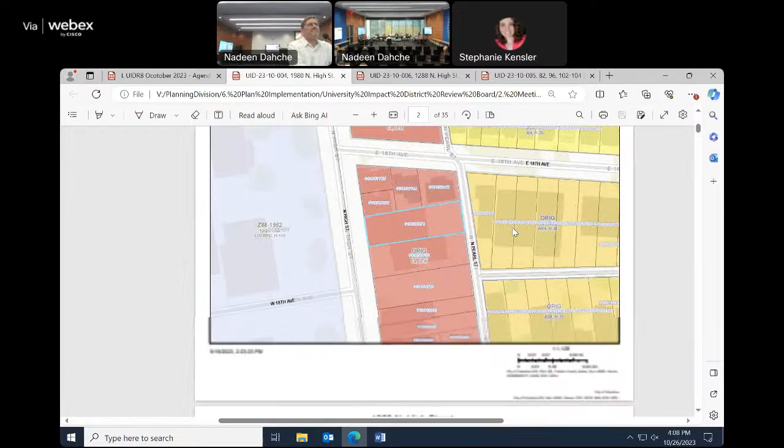Wow, okay. Do you have any - would you like to run through quickly? Certainly. So this is the application they submitted for the variance. And just as a reminder, this is the PNC ATM, where they were moving it from the vestibule to the outside of the building. The condition that had been placed on it was that some additional lighting was added, so some out here.

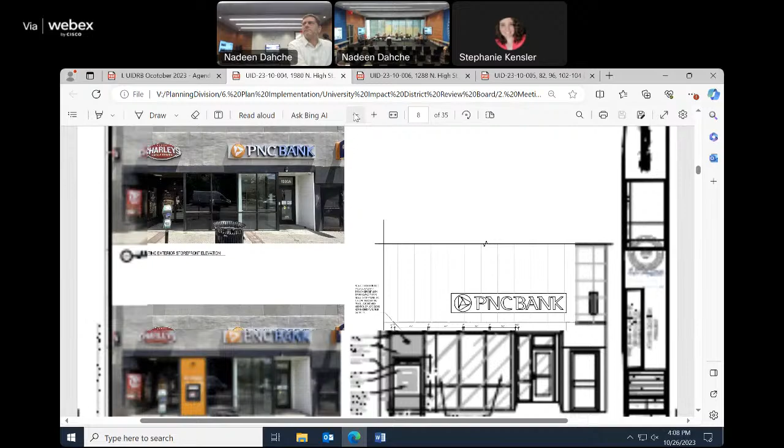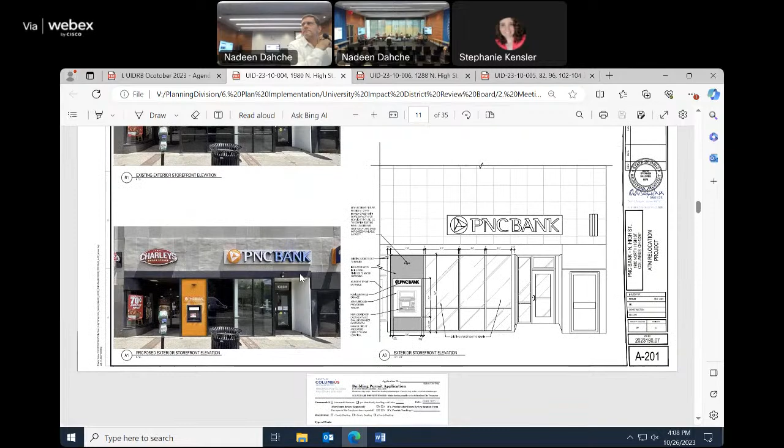So this is its future state. And what has caused the variance - here's just the COA showing that what they're asking for the variance for is the same thing that we approved. They just didn't know they needed the variance at the time. And these are the drawings that we stamped in the COA we issued.

Motion to approve. Second. Right, before we go there, is there anything you'd like to add?

I do need to swear you in before you speak, but if there's something you'd like to add, you're welcome to. Don't need to take up too much time on something like this. Do you swear to tell the truth, the whole truth, and nothing but the truth? Yes, I do. Proceed.

Just pointing out that the existing condition has, I believe, 55% full transparency of glass, and the new condition would not be reducing that in any capacity. It'd just be changing out one of the opaque glass panels for an opaque material for the ATM, for security purposes of things happening in that vestibule. That's really the crux of what they're trying to accomplish.

Before there are motions, are there any questions from board members? Can I make a comment, like a report from the University Area Commission? This came up before the commission in September and was approved unanimously with no comments from the public.

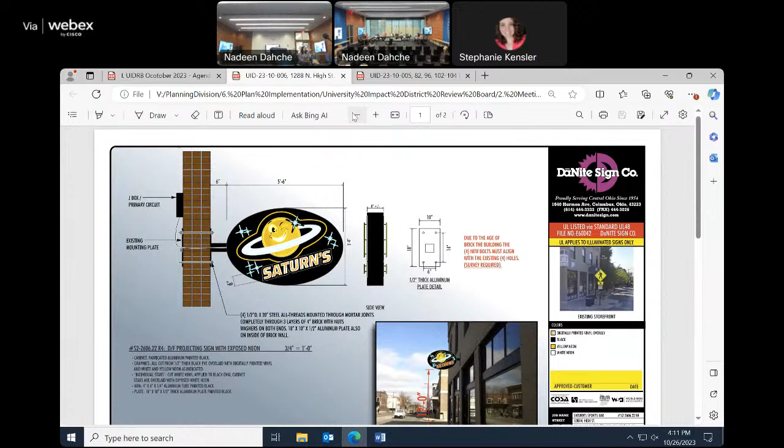1288 North High Street. The applicant is requesting review and approval of a new 5.5 foot by 3 foot oval internally illuminated projecting sign with exposed neon, per the submitted drawings. The submittal includes sign detail and a site plan, these two pages here. Let's see the size, the mounting details, its location, and here is the location on the front of the building. Here's High Street.

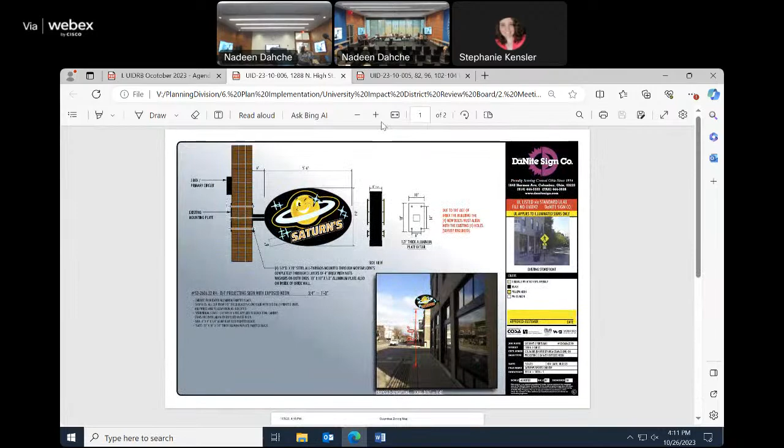After review, the proposal is generally consistent with the University District Plan. The plan recommends that new signage be a logical and complementary component of the overall storefront, not permanently alter historic building materials, and include a simple message. The University District Plan also notes a preference for projecting signs and specifies a minimum clearance of 10 feet from grade, overall size of 6 square feet per side, with lettering between 4 inches and 10 inches, and that signs should not project more than 6 feet.

The application is consistent with these recommendations, with the exception of the overall size, which is why staff couldn't approve it outright. As proposed, the sign is 16.5 square feet per side. Despite being larger than the plan recommendation, staff supports the proposal as it is appropriately sized for the building and location. Staff recommends approval. Is the applicant here? Yes.

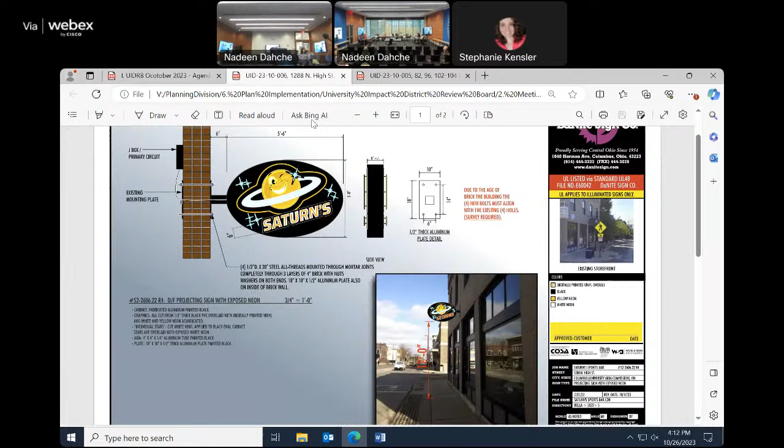Would you raise your right hand please? Do you swear to tell the truth, the whole truth, and nothing but the truth? Yes. Do you have anything you'd like to add to the city's review of the proposal? I don't think so, I'm happy to answer questions if you have any.

We did already make some adjustments based on making sure that we comply as much as possible. We felt like the sign that was there before, the North High Brewing sign, was actually larger than this, so we thought this would be fine. Was it a blade sign as well? Yes. Okay.

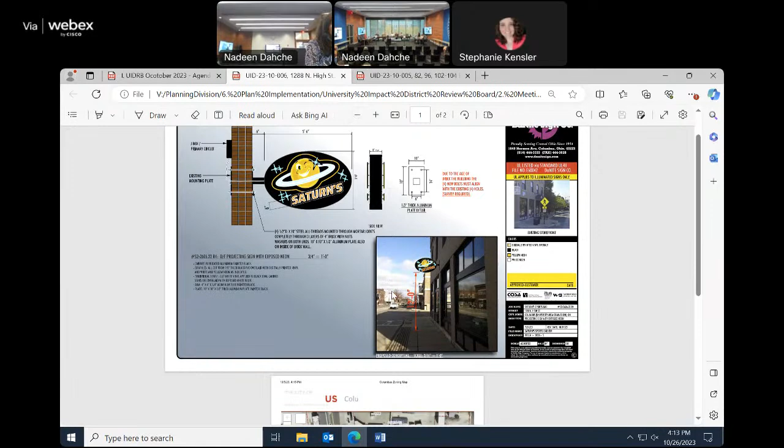I just have one question. Usually we ask that the bolts are covered, but it looks like in this graphic they're exposed. I don't know if the applicant was given models of what's typical, but in all past blade signs I've been part of the approval process, we've asked that they cover that piece of hardware.

We are planning on reusing the existing plate location. We told the landlord we would not make any additional holes in the brick, so I'll have to see what we can do to cover it. That's interesting because the previous one doesn't look like the bolts are covered, but we can see what we can do.

You're thinking about the last one we approved, but I'm trying to think about other examples in the nearby area that could give you a model for that. Yeah, that would be helpful, to know what you're looking for and how you want us to do it. Is that not specified in the guidelines, Steph? Not that I'm familiar with.

It doesn't really bother me as long as they're maybe painted black to match the plate. I would be fine with that. I don't think it would distract too much, given the height of it.

Are we making either covering or painting this a conditional approval? No, I would approve it as is. I'm just raising it for recognition of consistency with what we've done in the past.

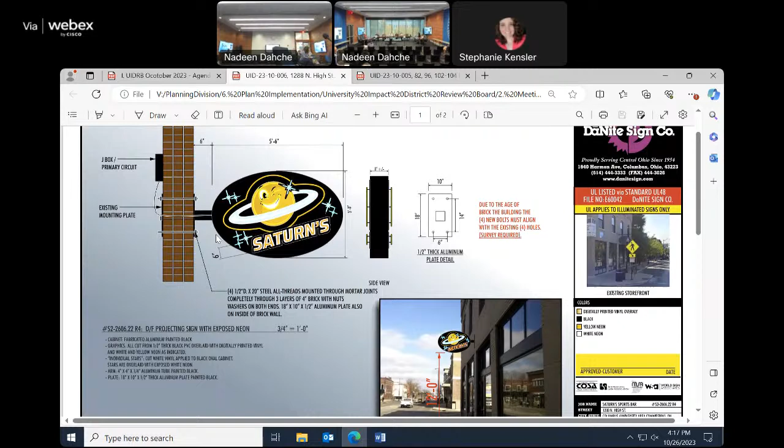Which brings us to UID 23-10-005, 82, 96, 102, 104 East 16th Avenue.

The applicant is seeking conceptual review for the construction of a new residential building. The proposal includes the demolition of several potentially contributing buildings on the sites, construction of a new 6-story residential building with amenity space, terraces, stoops, tall first floor glazing, street trees, and parking on a proportion of the first 2 levels. The submission includes a massing study. I'll go through that quickly - it's just a couple of pages - and then we'll finish up with that report.

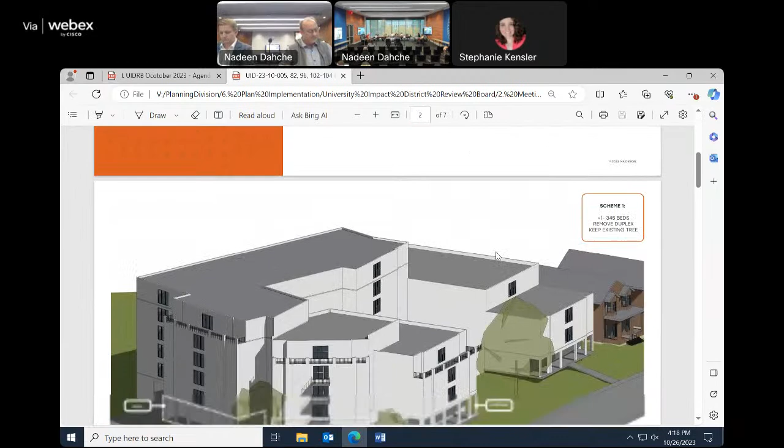If you all recall, at the last meeting it was suggested to the applicant that they go back and review these things, so they did that. That's why we're seeing much less detail this time around, and they're providing 2 different scenarios for the review and discussions.

So this is the first one. Essentially, this one is 345 beds. I know someone asked about parking - I think parking is staying the same, the applicant can confirm that. In this scenario, that third duplex is going away and they're keeping a tree here.

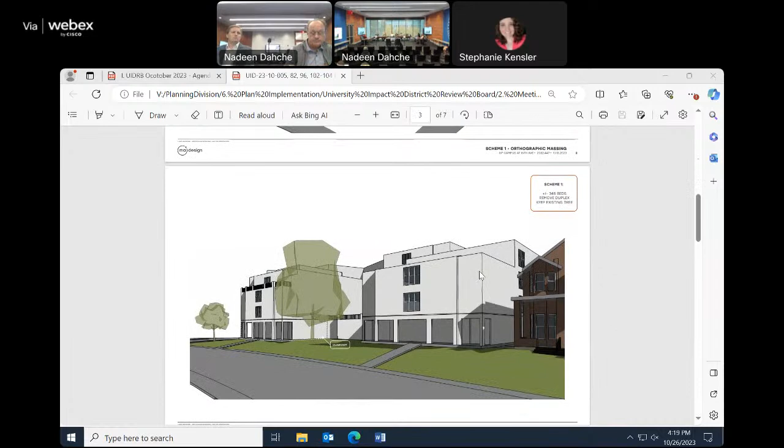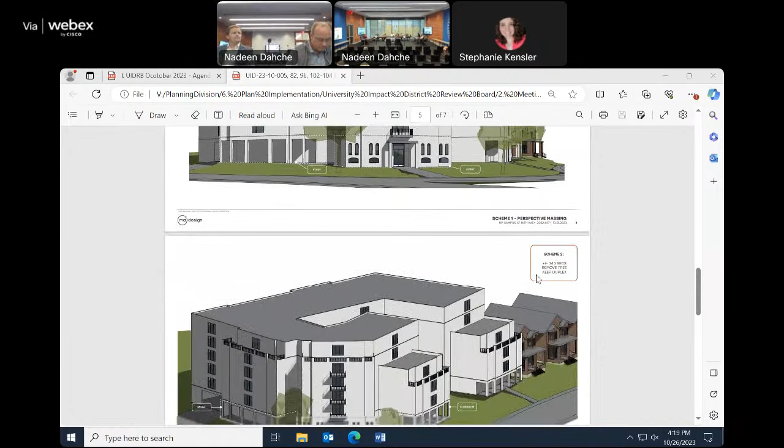And then here's the kind of more ground level view from 16th of that scenario, and here is kind of from the fork in the road. And then scheme number 2 keeps that third duplex, but we lose a tree here.

And then the massing is just a little bit different. And then you have those two perspectives.

So the proposal came before the UIDRB in July, August, and September. At the most recent meeting, the board stated that the applicant should reevaluate the massing and consider the taller portion

of the building being either in the center or along Waldeck with lower heights along 16th Avenue. The board also encouraged the applicant to explore a scenario where the third duplex is maintained and noted that removal of the mature tree along 16th Avenue could be supported if it resulted in a higher quality building design.

Upon review, the applicant has provided two massing options for board review. As previously noted, the recommended land use for the site is institutional. However, staff notes that these properties are generally surrounded by parcels recommended for higher intensity residential.

The plan does provide guidance on adaptively reusing institutional sites. As such, staff could support a higher intensity residential development on this site if the proposal is consistent with plan recommendations. The plan recommends that new construction be compatible with the surrounding neighborhood in terms of size and scale.

The revised options are somewhat consistent with this recommendation. While the proposal is more intense than the current use, staff understands the transitional nature of the site. Each option steps back into the neighborhood differently.

In scheme 1, a larger portion of the building has been reduced to 4 stories along the eastern property line as a transition from the development to the lower intensity portion of the neighborhood.

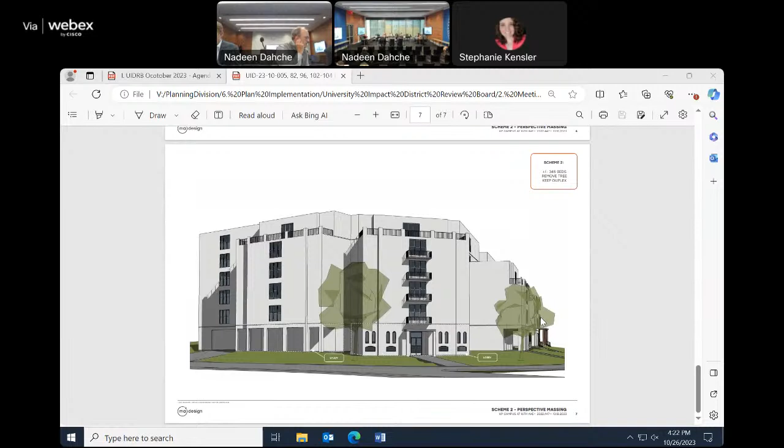In summary, both schemes are generally consistent with the plan, although scheme 2 is more so due to the ability to maintain most of the mature trees and green space, additional element of preservation, and more consistent massing along East 16th.

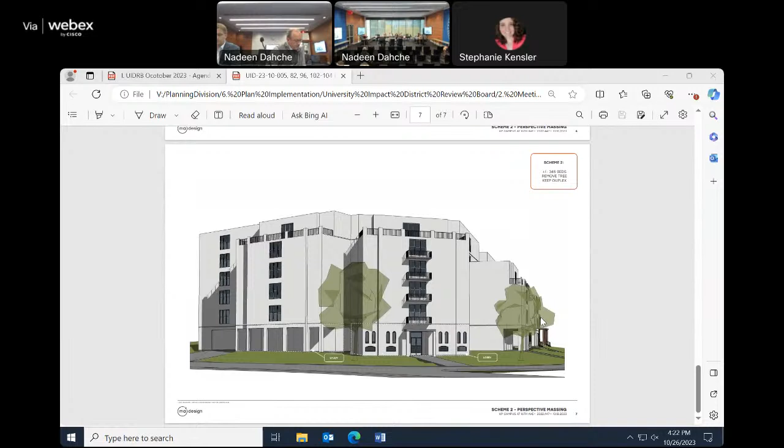Moving forward, staff recommends the applicant continue to take the University District Plan recommendations regarding building and site design, materials, lighting, landscaping, and parking into consideration as the design continues to develop. The applicant should be mindful of the applicable land use standards and engage with the Department of Building and Zoning Services to identify any needed variances.

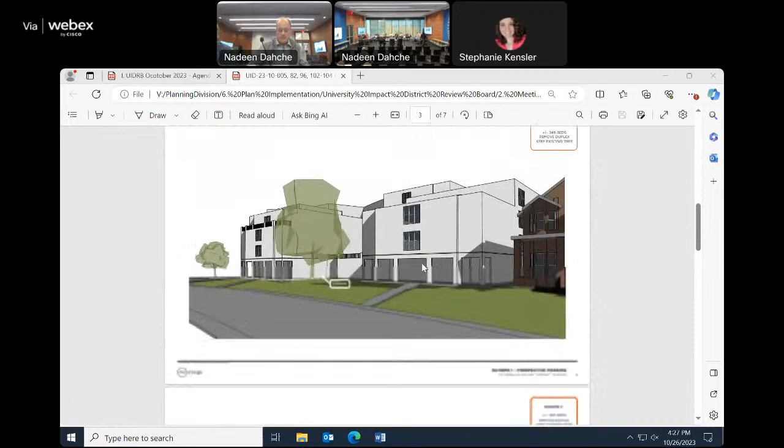There's, can you put it, I'm sorry, page 2 in that, because that has the plans on there, both the models. I think it's helpful to see both. Is that page 2? The one that's got both. Page 2, it's this page. Where's the page? Well, while she's looking, it's fine if that's the one you got handy.

The point I wanted to make was that we looked at the site as we have been looking at it, which was basically taking down the residential property to the east. And we looked at a different massing study to specifically address the concerns about the frontage of the building on 16th and Waldeck Avenues. So what we ended up doing is basically stair stepping the building.

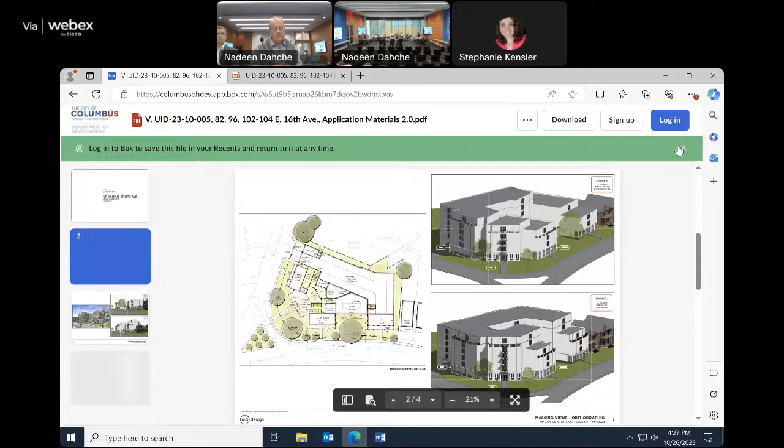There you go, perfect, thank you very much. So the top scheme, on the top right, is scheme 1. That's the one that doesn't retain the building to the east and also the tree.

And I will make a point, Carrie, I did go up to Worthington Thomas. I live in the Worthington area, so it's not that hard. But I looked at those trees that are being preserved out there along the street frontage, and those trees are much bigger. Yeah, very big, they're monumental trees without a doubt. But the amount of land that they were using or taking to protect those trees during construction was phenomenal.

Yeah, it's very significant. So to your point, I'm not sure any one of these schemes would really be able to save that tree because of the proximity of the root base to the construction of the building. So I think that's something we do have to consider, because if you use that as an example, and whether it's a fair example or not, it's a real example.

Saving those trees would probably require you to cut out at least maybe 25% of the site just for the sake of preserving it during construction. So that's something we have to recognize in terms of, is that practical? Is it reasonable to try to look at?

This scheme shows it because that's what was consistent with the first scheme that we showed. But the whole idea here was to step down the building. We looked at the massing on the northern side and kept the height of the building there, and then just looked at an artful way—I know there's still a lot of work because this is concept—of stepping the building down as it went around the corner, addressing the corner specifically, working the mass of the building down as it went eastward.

So in scheme 2, we lost the tree in that particular scheme, and the building does end up to be a little bit more massy. I think that's the thing that kind of needs to jump out at people. We took the cues of potentially keeping the residential building, but getting more mass on the site in retaining that building.

So we did that, and to some degree it's a comparison, because I think it's important to note that the first scheme seems to go in the direction of accomplishing the massing concerns relative to the frontage of 16th and Waldeck. Whereas scheme 2 accomplishes the goal of retaining the property to the east, but it gets away from the massing considerations.

So I think therein lies probably one of the main conversation points moving forward for today. It's an either-or, it's one or the other kind of scenario here. We're trying to come up with the right, appropriate scheme that fits the site but also accommodates the concerns from the board in terms of architectural massing and density and such.

One thing I do want to note, because they made a note about the parking and the difference between the two schemes—the first scheme does retain the original amount of parking, which was 95 spaces. The second scheme, because of the reduced footprint, loses that parcel, so we lose 40 feet plus the setback that we'd still have to provide on the remaining piece of the property. So we effectively lose about 50 to 55 feet on that church site by itself.

That reduction in buildable land significantly hurts the footprint of the building, and truthfully it cuts our parking in about half. And that's a problem for everybody. I think there are obvious concerns about parking throughout the board and in the area.

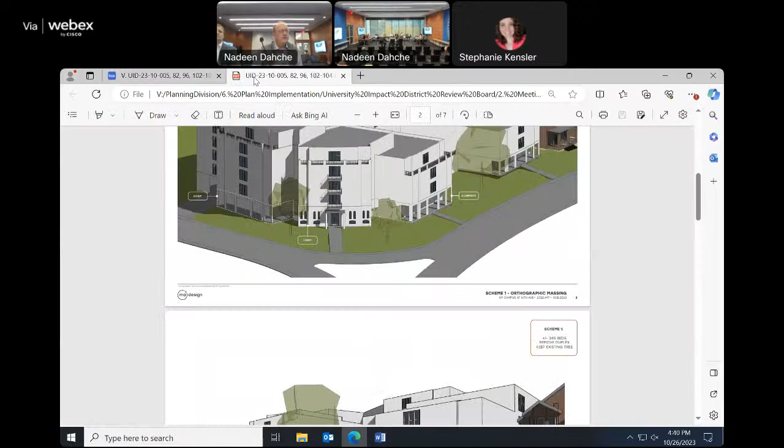If I can respond to one of Susan's comments about the density migrating eastward off High Street - I question that a little. There's a 2-block area, from 14th to 16th, that in my opinion has been intentionally set up by planning for higher density development. I brought this up last time at our meeting about the zoning heights for those other parcels. I think you're very correct - 14th to 16th was a defined area designed for this, but it was not envisioned for this side of 16th. So it's important to clarify, because you're correct there, an overall planning decision was made and approved by this group and others, but that's public space.

That's a public endeavor, a public university. So all the space and artifacts that have grown the height on the west side of High Street are part of the public campus. What you're bringing is a private endeavor, private market, and that's a challenge for me. You're looking at it from the point of view of the project you want to achieve and the profits, which isn't really our scope. But what Susan articulated well is that the planning process has deep roots in the past and is geared toward the future, balancing many people's ideas and goals, community with university, with the city. What's happening with this site is it's challenging those things, and a lot of people see that as risking the quality of life for others who chose that area for its character.

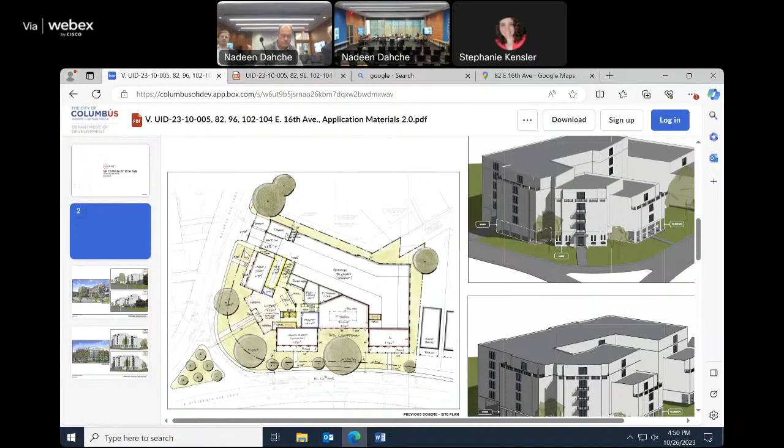One of the things we kind of discussed with the church is, we heard those comments before in previous meetings, that it should make the building approachable from the streets, a very prominent corner, we understand that. But making this available on Sunday mornings for church gatherings, or for anyone really that wants to come and—I don't think worship is the appropriate word—but to gather in that space, is something we discussed with the church, and it's something they would be interested in.

It's a little ironic that the existing obvious gathering place, among other aspects of its significance, is being eliminated.

The existing gathering space is a defunct church that can't really operate anymore. I think, and I sort of got to this a little bit last time—just as a matter of respect for architectural heritage, let's not speak in a dismissive way about what that interior is. If we're going to eliminate it, unfortunately, let's at least be respectful of it.

We're trying, I think, to—we have, yeah. Okay, but I mean, I hear what you're saying, it's more than just a defunct church. It's a great space. It has great elements and great materials. The church can't function in its former function...

and therefore the boiler doesn't work. The building still has to function to have a congregation and things like that. I'm not trying to create—that's what I would say. I'm just asking that we be aware of and respectful of the architecture. Unfortunately, we are, I think the jeopardy comment is relative to the structure at large.

I mean, it's tough, right? I think because, based on the discussion, we kind of know where the hot points are. I do agree, I think you've taken the comments from previous sessions and tried to integrate them into the schemes.

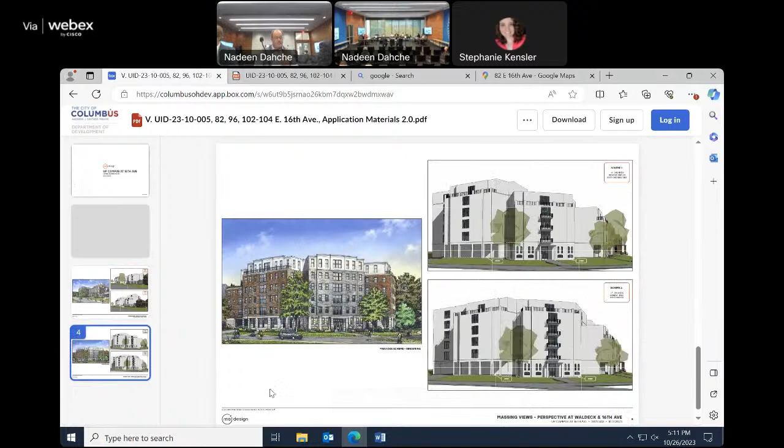So 16th Avenue offers an opportunity. Waldeck is a different environment, and you have the institution of the Presbyterian Church. Are there things that might recognize the virtues of that? I think right now the houses across Waldeck owned by Hillel are maintenance deferred and don't have the same integrity as, for instance, the duplexes.

Can you find other things about here? And I'm not suggesting you make a pastiche, a little of this, a little of that. I'm suggesting as architects you have more cojones to make something that's a really strong work of design. That might mean a series of row houses on 16th with an 8-story building on Waldeck. I don't know, that's up to you.

What I'm saying is I'm concerned when I hear my colleagues talk about overdensity and too much stuff, which we recognize. I think Susan was most articulate that this is pulling something that belongs on the urban corridor of High Street into the neighborhood. So at that point, that's a hurdle to overcome. But if you can show us a real work of architecture, great design with a strong sensibility about how you understand the neighborhood and what its future could and should look like, I'd be very interested in talking about that.

I think we're not going to end up with a very successful project. We keep whittling and smushing and growing, continuing to take what you have like a piece of Play-Doh and oozing it around different ways so you get 345 beds. To me, that's not a process for making architecture. There's so much great architecture in this neighborhood that it's disappointing to think about bringing in something generic, that looks like things we've seen elsewhere, that has poor quality construction, just so you can get enough beds on the site to make it pencil out.

Well, I would disagree that this is generic, because this is a very custom building to fit this particular site. One of the design moves we made early on was breaking down the massive building on both Waldeck and 16th by creating different facades along that vary in size and scale. So the whole idea was to try to get a street rhythm, if you remember me having that conversation with you in previous meetings.

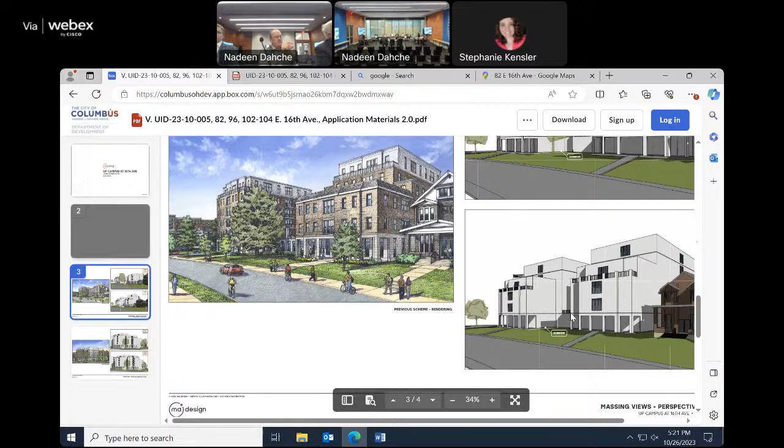So your opinion is to... Yeah, I need 3 stories next to that and keep the duplex on that particular leg of the building. I understand, but I just want to be clear, your opinion is to not extend the 6th story to the eastern wall? No, I didn't say that. I said I wanted to see the 3 stories next to the duplex that is kept.

I'm gonna say Lori's tougher here than I am, so you make her happy. I just want to be clear, you know, because we have 3, well, 1, 2, 3, I'm sorry—1, that's 2, 3, 4. On the lower level. Understand? See what I mean? Yeah.

So just take it down back to the leg, and keep the duplex. My apologies, Lori, but are we talking about that little nub that she's pointing at—carve that off, or does it need to go? No, it needs to go back, as we discussed before.

This corner, right? Yeah. So on that eastern leg, you're okay with 3 and 4 story? 3 at the front, 4 story in the back, or 6 in the back? 6 in the back. 3 in the front. Yes. Got it. So no 4 story on that leg.

No. We did look at that and we felt it uncomfortable to go from 3 to 6. If it's really good architecture, it probably would work. Touche.

Just to clarify, we're talking keep the duplex, 3 stories along 16th, and that steps back to this corner. And the 6-story portion could go over to here? It could, because that is behind the depth of the duplexes. Correct, and a little bit actually back, not if we look at the site plan next to it.

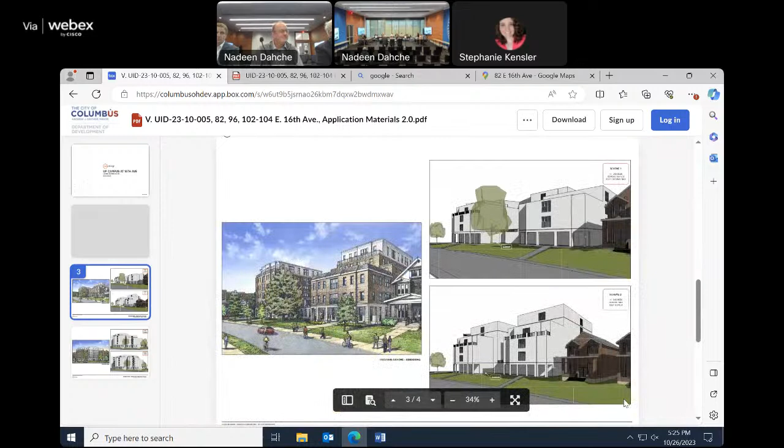Process, blah, blah, blah, blah, blah. But I think if that is fixed, and to Lori's suggestion, that's going to go a lot further at getting 4 votes, which is...

I guess, Carrie, do you need to wrap up the meeting? Yeah, I'm personally done. I've just been asked by our leadership to try to keep discussions to 20 and 30 minutes, and this has now been an hour on your project. Well, it's a big project. We're done, I just want to say thank you for the specific comments.

Every large development project I've been involved with on the zoning aspect that's come to this board has gone through 2, 3, 4, 5 meetings to get to some consensus of this is approvable. And then that's when John's real work starts. So if you're sticking to the zoning code, it goes quicker. The problem is when you're trying to push the envelope like this one is, you've got to expect it, you're going to have to put more time in. And that's fine, we're obviously willing.